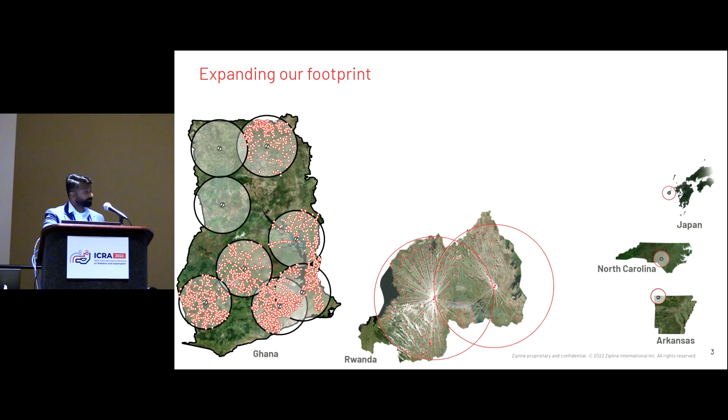More recently, we started operations in Japan and the US, primarily in North Carolina and Arkansas. Our US operations are actually low volume as we are going through certification at the moment. We also plan to extend our footprint this year to Nigeria, Cote d'Ivoire, Kenya, and Utah.

So how does our system actually work? An order is initially placed by a healthcare provider. This can be done via our fulfillment system or WhatsApp message.

Once our fulfillment operators receive the order, they pick and pack the product in a cardboard package and put it in the Zip. The assigned Zip is then launched from our distribution facility, where it travels autonomously along a pre-planned route to the target destination. This is done at approximately 300 to 400 feet above ground.

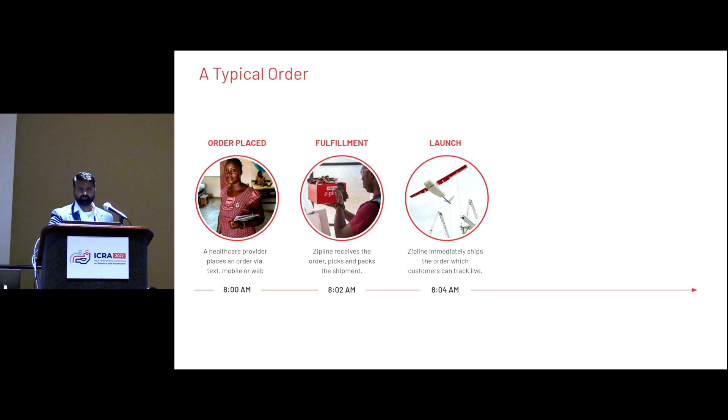As it reaches the destination, the Zip informs the customer of a pending arrival and descends down to a lower altitude of approximately 100 feet, then parachute drops the package to an assigned target destination. We typically achieve a 6-meter radius accuracy, about 2 parking spots.

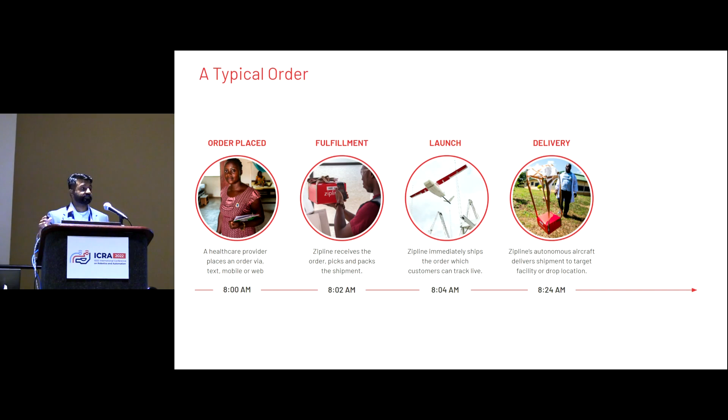Once the order is delivered, the Zip returns back along the same route to be recharged and reloaded for the next order. So here's a little video that gives you a sense of what the operations are in Rwanda.

What you see is a typical flow from our fulfillment operators that have packed and assigned the product to the facility. The flight operator receives the package and assigns it to a Zip prior to loading it. As you can see, the package has a paper parachute that's clipped into the payload bay of the Zip body. The vehicle is divided into 3 main components: the body, the wing, and the battery, which is designed to be interchangeable.

These, in addition to our foam nose cone, are assembled on our launcher prior to every launch. As an aside, the launcher we use is a catapult launch system that accelerates our vehicle from 0 to 110 kilometers an hour in 0.3 seconds.

This is done to handle the wide range of wind conditions that we have to operate in. Once assembled, a series of pre-flight checks are performed by our flight operators, as you can see. This ensures that the vehicle is in nominal conditions.

Internally, there are over 450 software pre-flight checks performed prior to enabling the launch of the vehicle. All of this is done within a minute of when the battery goes into the body. This is to ensure we can hit the flight volumes of more than 200 flights a day within a 12-hour span.

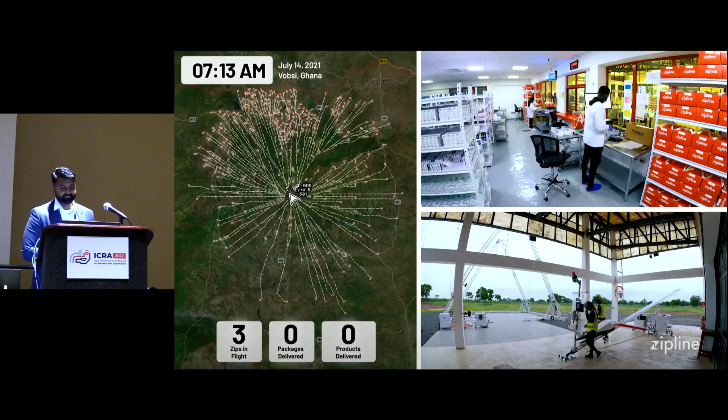Shown here is a typical morning at a Zipline facility in Ghana. On the top right is actually a fulfillment area. On the bottom right is actually a launch and recovery area.

Our recovery system is designed to recover vehicles similar to an aircraft carrier. There's a little A-frame structure you see there. I'm not going to go into too much detail, but I encourage you to check out videos on our website.

On the left is actually a visualization of what the controller of our Zips watches on the iPad UI. The red nodes are 300 to 500 healthcare facilities that are served by our distribution center. Zips en route are shown in white arrows, and zips returning back are in black.

At any one time, we can have 20 zips flying along the same route in the air. At the moment, we can fly up to 28 zips at any one time, delivering to our customers.

Here, it's easy to see that these facilities are dynamic environments that have unpredictable demands and emergency orders that make it difficult to schedule everything that we need. Just within a 4 to 5 hour span, we have done 71 package deliveries of about 550 products.

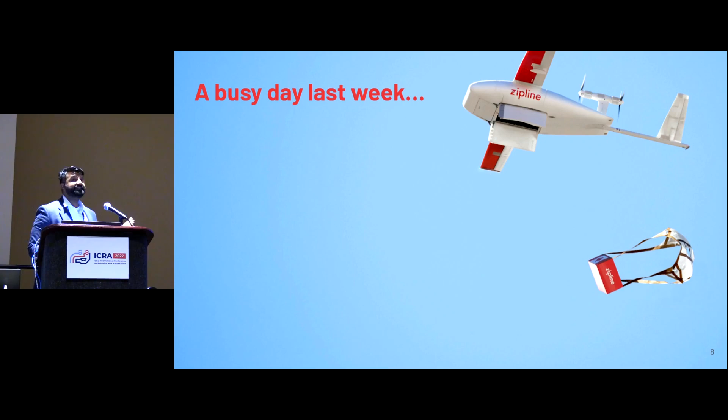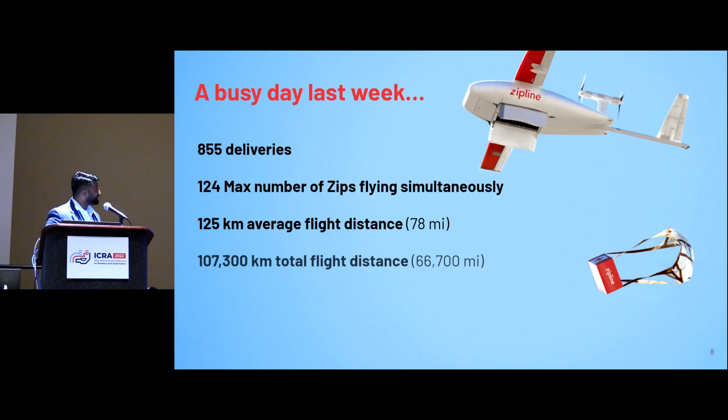To give you a sense of the scale of all our flight operations, here was a busy day last week. In total, from our facilities, we had 855 deliveries, with a maximum of 124 zips flying simultaneously, and an average flight distance of 125 kilometers. This translated to a total flight distance of 107,300 kilometers flown in one day, equivalent to 2.6 times around the equator of the Earth.

As we discussed, achieving 28 zips at once in shared airspace requires shared airspace and shared resources. We think of this as airspace autonomy. It's really difficult to predict when a zip will need to modify its mission, so there needs to be an online algorithm that keeps our zips safe.

Our zips are at times in places where there's no cell connection, and there's literally no phoning home. So centralized planning algorithms don't work. What we've designed instead is a distributed collision avoidance algorithm and distributed resource allocation algorithm. There's only one launcher and one recovery system, and this is robust to lossy comms. Each of our zips has its own line of sight radio and dual cell modem, and whenever they're in proximity to each other, they communicate.

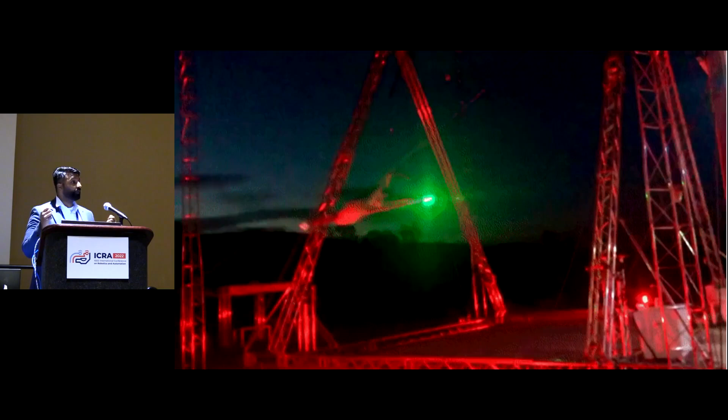All right, that was a quick primer into our mission and current scale. Now I want to give you a bit of backstory as to why we developed our detect and avoid system. Our detect and avoid system is ready for production today, and you're the first folks outside of Zipline and the FAA to hear about it.

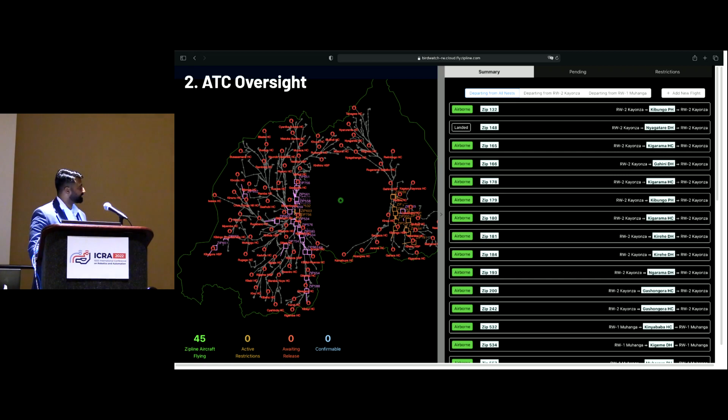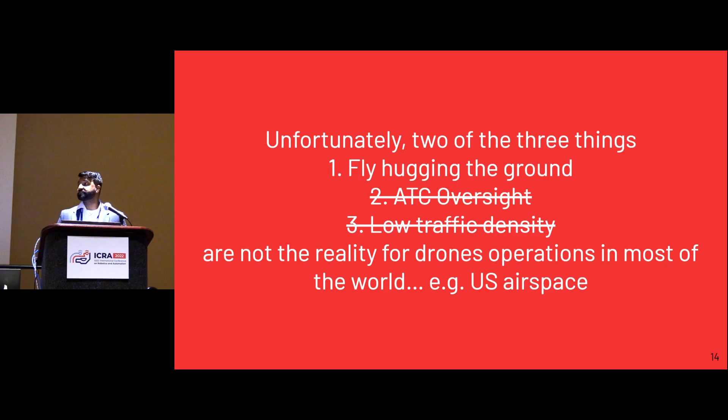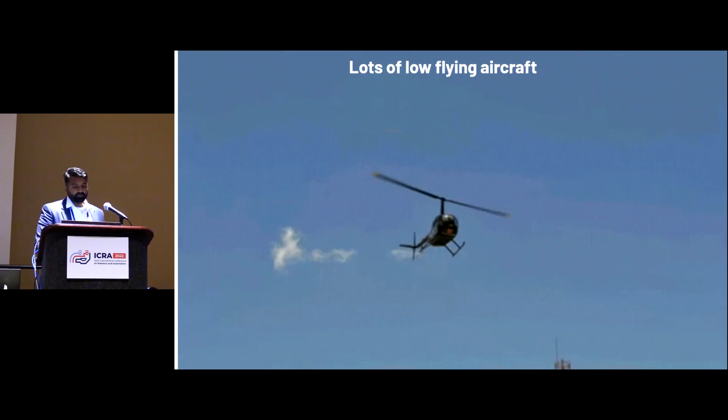I'd shown a typical Monday morning in Rwanda. This is a typical Monday morning in North Carolina, Charlotte. There are orders of magnitude more traffic that we have to heavily account for. In addition, the prevalence of low altitude operations is high in these areas, as there are no real restrictions preventing flight below 500 feet, especially for helicopters and crop dusters.

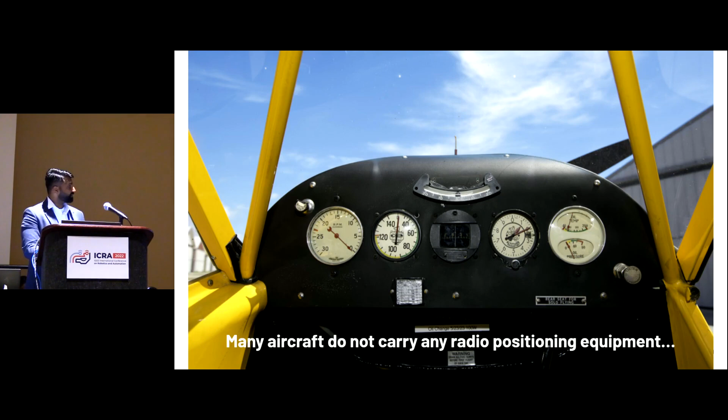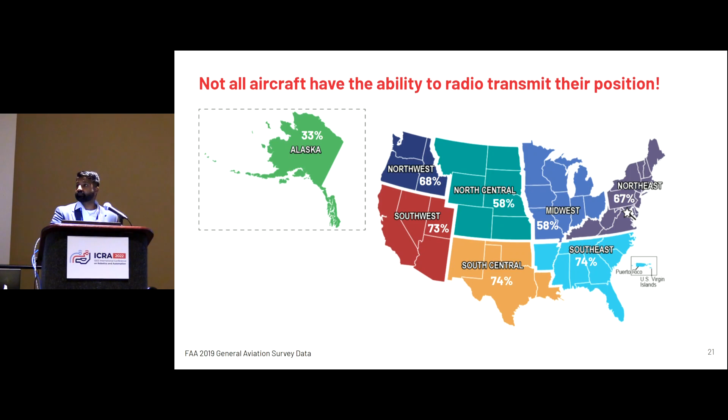The airborne risk associated with the prevalence of low altitude traffic and high traffic densities is amplified by one more factor: many of these aircraft do not carry radio positioning equipment, also known as transponders. Here's a typical cockpit of a Piper Cub that has just analog dials, with no radio equipment on board. A survey performed in 2019 by the FAA showed transponder usage hovered around 70% in certain regions, and was especially poor in the Midwest and Alaska, where it's about 33%. It's quite mind-boggling, the number of low-flying aircraft with no positioning equipment.

How do these planes actually not hit each other? They just look out the cockpit. The pilot's ability to see and avoid is the approach used to solve the uncooperative detect and avoid problem, which is aircraft with no positioning equipment. The effectiveness of this ability has actually been studied deeply, and it's not great, especially when you think about pilot reaction times.

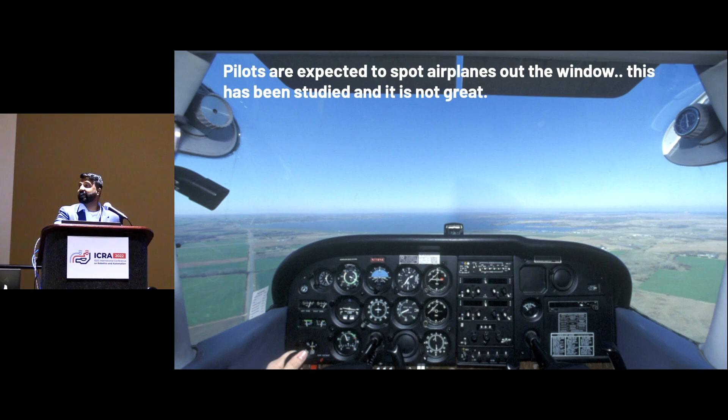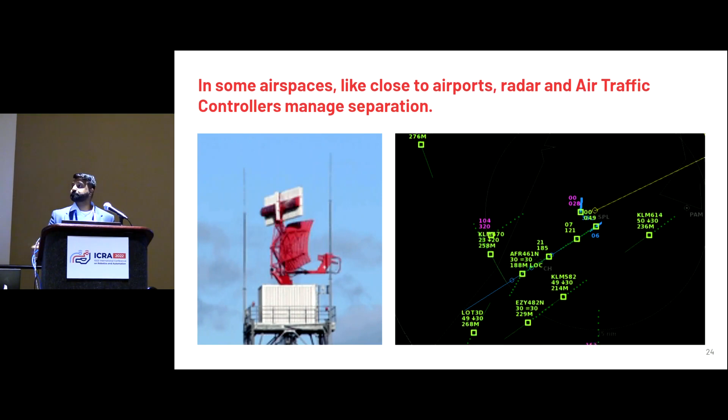In some airspaces, such as close to airports, there's radar that has the ability to track aircraft, and there are specific rules around operating in these airspaces. But radars are sparsely distributed, and the moment you get below 400 feet, it's very hard to detect with radar. So it looks like we had to solve this. To actually solve this problem at a truly national scale, our zips would have to have an onboard sensor. It's entirely impractical to think of populating a whole country with ground-based radars. We actually thought of that and tried to figure out how we would achieve it.

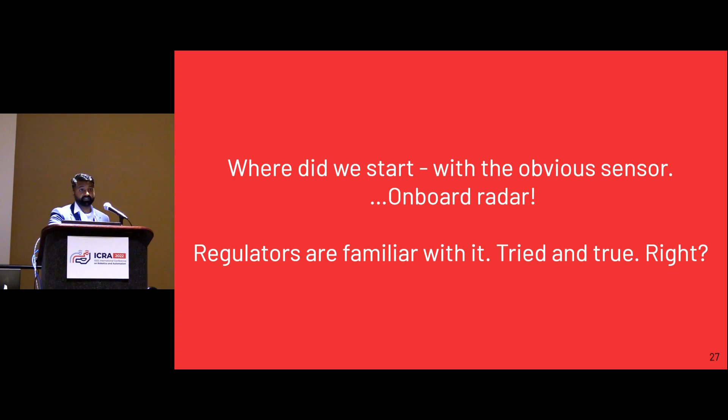The journey to build our onboard detect and avoid system. So first off, where did we start? We were thinking about the most obvious sensor to use. The biggest one is, let's try an onboard radar. Regulators are familiar with it, it's tried and true. So we started doing a bunch of testing with the current state-of-the-art radar systems pitched for sense and avoid.

Right off the bat, for the field of view and elevation provided by that sensor, it took quite a bit of mass and was power hungry. To put 60 watts into perspective, our zips cruise at 600 watts. This radar sensor would consume 10% of our power budget, which was pretty wild.

Nevertheless, we kept testing to better understand the system. A failure mode we started to find is that aircraft between the drone and the ground, within the radar's field of view, really struggle with the signal-to-noise ratio problem and don't get detected. If you're familiar with this in the autonomous driving space, you know this problem too. So looking forward with a limited field of view was clearly not going to work. There's aircraft coming from everywhere.

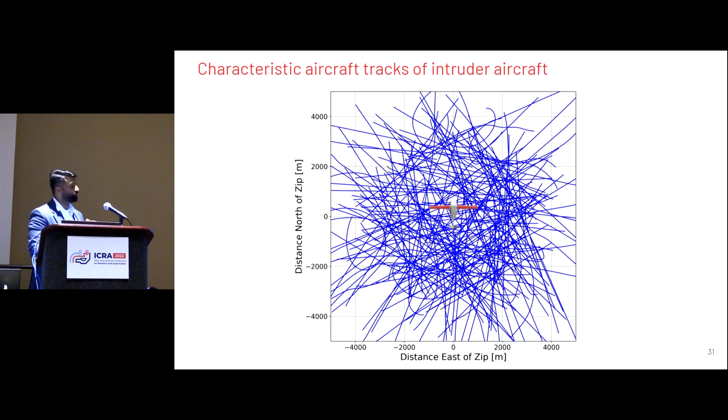Here's a visualization of this in action. This is a visualization in a zip-centric frame showing characteristic general aviation tracks built by MIT Lincoln Lab, trained on years of historical air traffic data. Our zip is not to scale, keep in mind. In general, if a Cessna collides with another aircraft, it's the Cessna's fault. But if the Cessna collides with our drone, it's our fault. The drones do not have the right of way, so we have to avoid and yield to all aircraft. Obviously our zip needs to see 360 degrees, so we started thinking about what other options we had.

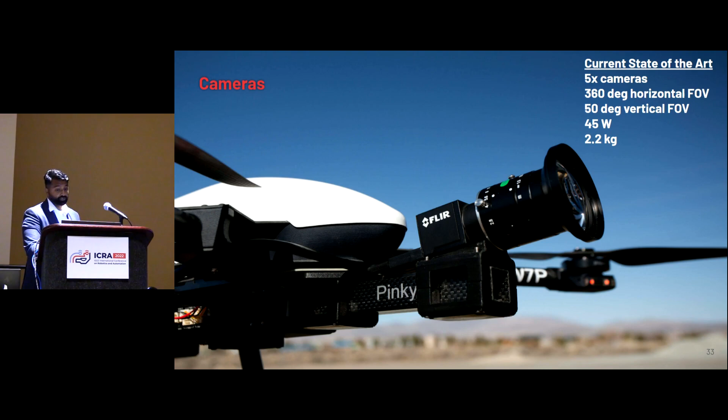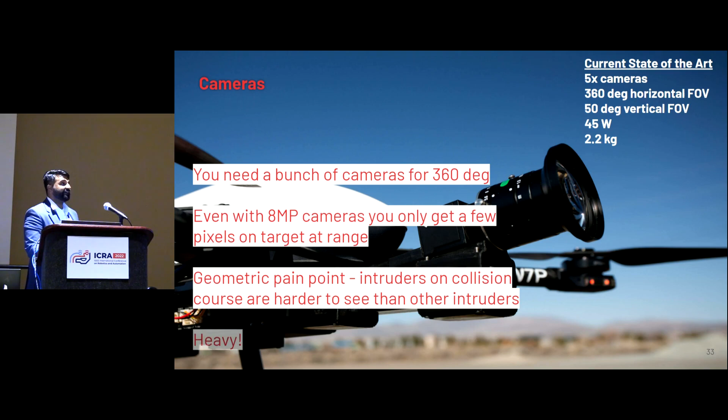We next looked at cameras, with a critical need to ensure 360-degree coverage. It was evident that a bunch of cameras could achieve that. We needed a bunch of cameras to get 360-degree coverage, and each would have to be at least 8 megapixels in resolution to ensure we had enough pixels on target. Cameras also inherently suffer from a geometric pain point: if an intruder is on a collision course with you, it's a dot that doesn't move, and it's really tiny. Finally, they're heavy and quite power hungry.

The biggest kicker is that we fly regularly into and out of clouds and close to clouds. Medical emergencies do not wait for clouds to clear, and this is one of the Achilles heels of cameras. Basically, we need 360 degrees and also the ability to work in clouds.

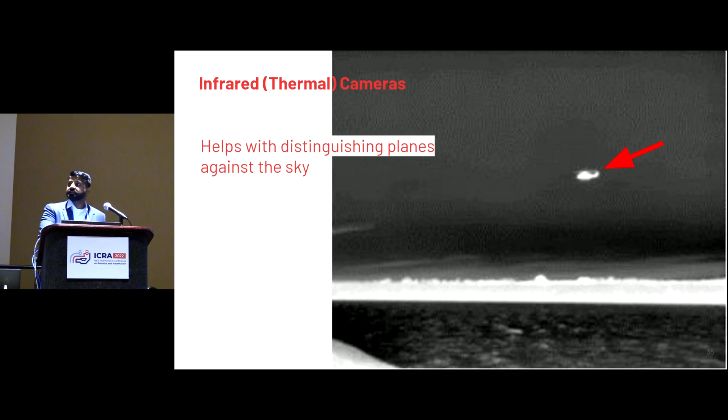The next thing we started exploring was further up the electromagnetic spectrum: thermal imaging. In general, its performance was observed to be pretty great, especially against the background of the sky when detecting aircraft. However, the moment there's an aircraft below the horizon, this became problematic. There are actually two aircraft in this image. And generally it became a non-starter, as one to two megapixel imagers were the state of the art, which doesn't give us nearly enough pixels on target.

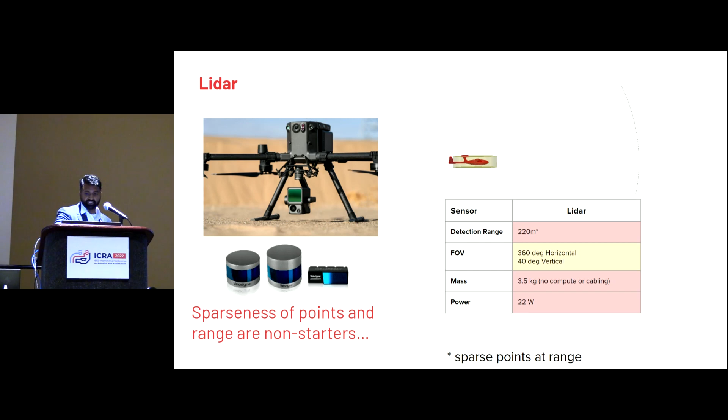You might be asking, why not LiDAR? This essentially became a non-starter, primarily due to detection range and the sparseness of points at long range. So we seriously tried everything we could on the electromagnetic spectrum, and we were stumped. How else could we actually solve this problem?

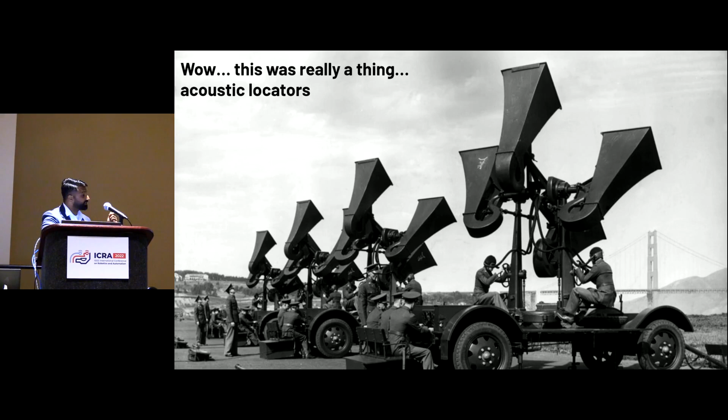So what about acoustics? There's a lot of historical literature where acoustics was the primary mode of detecting aircraft in World War I and early World War II, prior to the advent of radar. Here's a photo of soldiers listening for aircraft. Acoustic locators were used from mid-World War I to early World War II. These were passive devices that picked up the noise of engines and propellers of aircraft. The horns you see give increased gain and directionality. In addition, the spacing between the horns gave the listener—the soldiers—the ability to localize the sound source. It was wild, but these acoustic locators could actually hear planes well over the horizon, tens of miles away.

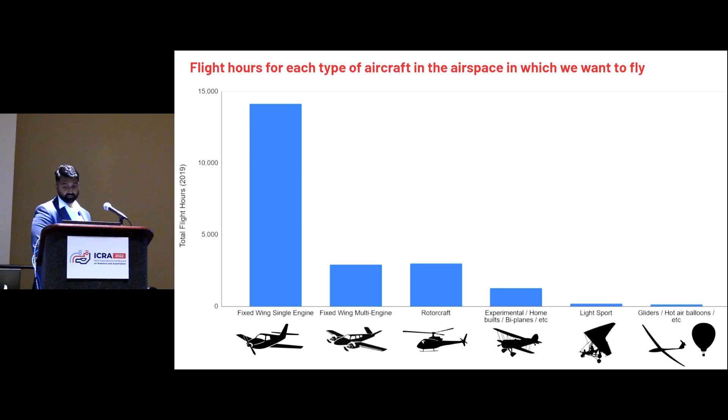Not really all aircraft are loud, as you may surmise. So even if we could solve this technical challenge, could we achieve the necessary level of safety with an acoustic system? We started digging into the data of all the aircraft that typically operate in the airspace and broke it down into various critical categories. We realized that 98.5% of these aircraft are propeller-driven, rotorcraft, or turbojet. This is great, so we would not even need to get 98% detections to achieve our level of safety. As a side note, 98% is better than a pilot looking out the window, essentially.

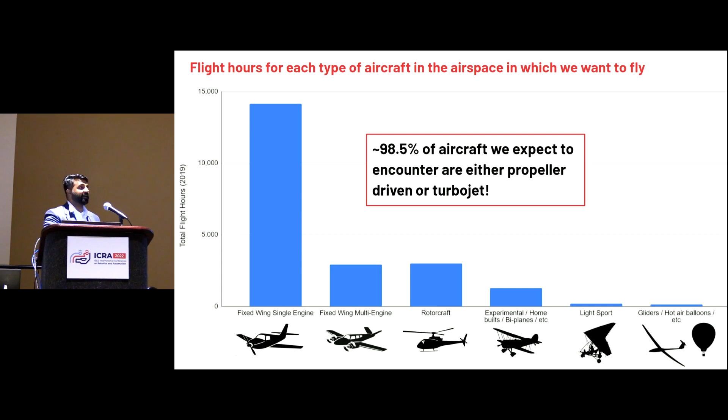At this point, we weren't convinced about this idea, but it was super attractive because in theory, we could get 360 degrees field of view in technology that's light enough to actually fly on a drone. So we asked ourselves, how can we actually kick the tires on this problem?

Our first experiment was just putting some microphones on the ground to see how far we could hear the aircraft. It was actually really far. We could get easily detections up to 2 kilometers away on any day. The ground rig was equipped with 6 microphones in a T-bar and a little 2-megapixel camera.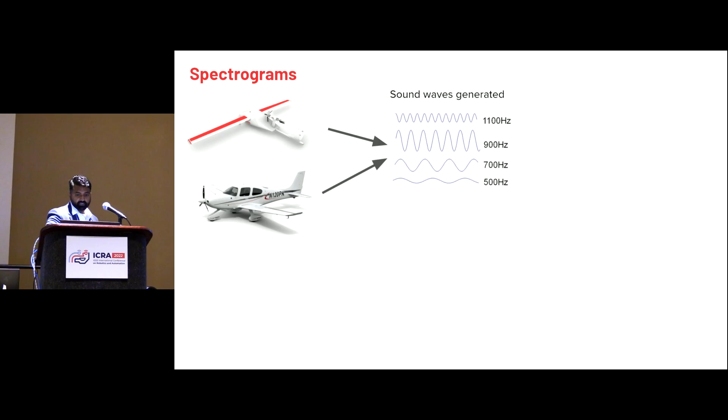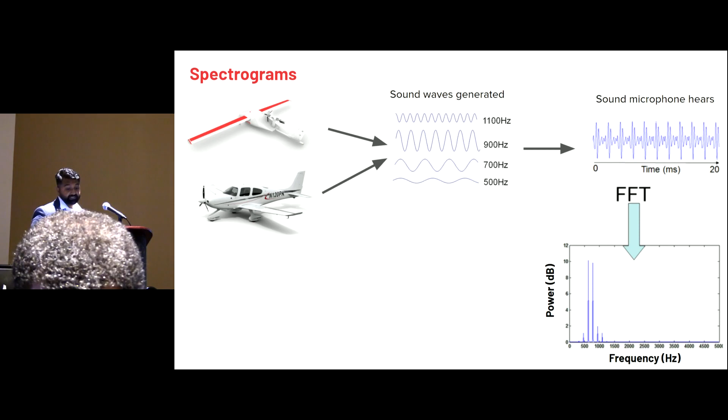As an aside, given that we're going deeper into acoustics, here's a quick refresher on spectrograms. Any sound source generates sound waves at multiple frequencies propagating through the air. A microphone like ours on the ground recorder records the amplitude of sound at about 20 kilohertz in the time domain. The recorded sound is then converted into a frequency domain at specific time intervals using a fast Fourier transform, where dominant frequencies clearly show up at higher power levels. These frequency snapshots are strung together over time to form a spectrogram, where the color displays the power levels of that frequency content.

I mentioned easily being able to capture acoustic signals at least 2 kilometers away. I want to visually show what it looks like. Given that we had a camera on board that ground rig, here are a couple of examples of aircraft images captured with that rig and comparative spectrograms. We captured an SR-22, a general aviation aircraft, at about 3,000 feet, that little dot on the camera in the red circle. At the same distance, the spectrogram distinctly shows a specific signature related to the blade pass frequency of the propellers and its harmonics. On a first principles basis, the typical RPM of an SR-22 flies at about 2,000 to 2,500 RPM, with 2 to 3 blades, and that translates...

Awesome, talking about acoustics. All right, I don't have to shout, and I think the acoustics here are pretty good, so let's go.

Cool, so this translates to about 100 to 150 hertz for the fundamental frequency, and multiples of that in the harmonics. That's exactly what you're seeing in this plot.

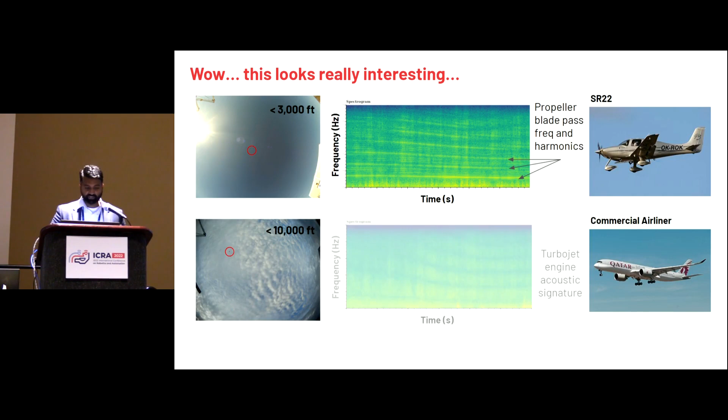Similarly, we captured a commercial turbojet airliner at 10,000 feet. The acoustic signatures here are also unique and very different from that of an SR-22. The regions of high power are actually more broadband than the peakiness in the SR-22.

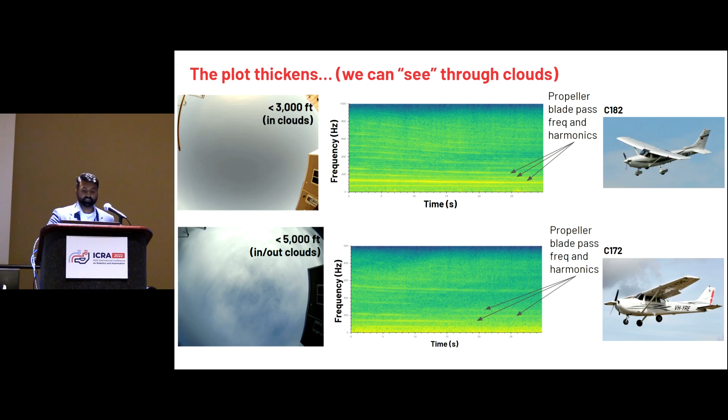Interestingly, we also captured air traffic when there were low cloud layers at our test facility. Here's an actual video of a Cessna 182 overhead going into and out of clouds. It's actually really hard to see, but it's actually a video. The same thing was evident - the acoustic signatures are clearly visible during this whole time. The same thing was evident from a Cessna 172 as well. It was actually a revelation, to be honest, on our end, to see how clear these signals were, despite how degraded the camera performance was in dealing with it.

After our first set of experiments, we were like, let's start flying. We got excited and decided to make a jump into the air. We went straight for gold and started embedding our mics in a wing for an RC plane that we had, to make sure it was the lowest drag and most ideal configuration we would like. Immediately we ran into a problem.

In essence, there are 2 big problems once you get in the air. The image of a dog sticking its head out the window is actually to visualize what a microphone hears when it's in the air. The loud swishing sound you imagine hearing when you stick your head out the window is primarily due to aeroacoustic noise generated around your head and the car itself.

General aircraft aeroacoustic noise was our first problem. The second problem we had to deal with was our own aircraft's propeller ownship noise. So these were the 2 big issues we had to work on.

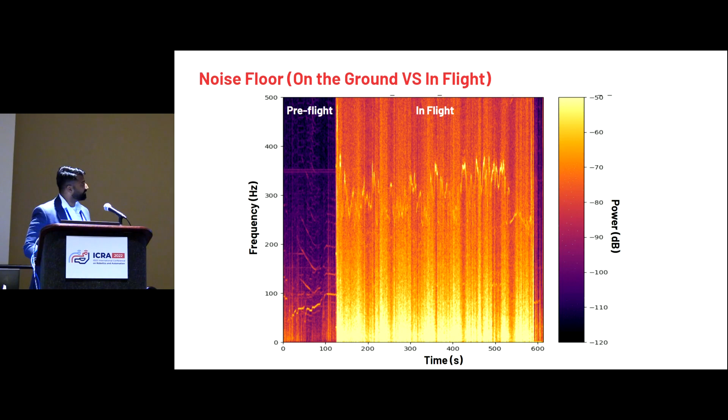The moment the aircraft was in flight, the first thing you notice is the prevalence at around 300 to 400 hertz of our propeller ownship noise. The second key factor observed is this general aircraft aeroacoustic noise that critically impacts our low frequency regions, which is exactly where we need to detect general aviation aircraft and helicopters.

So we had a problem, and we figured out what we needed to do, and essentially what we did was form what we call a tiger team. It's essentially the smartest minds in Zipline, including mechanical engineers, applied mathematicians, and systems engineers, to ruthlessly prioritize and focus on failing fast and achieving in-flight acoustic detections of a Cessna 172 up to 1.5 kilometers away, or know why it could not be done.

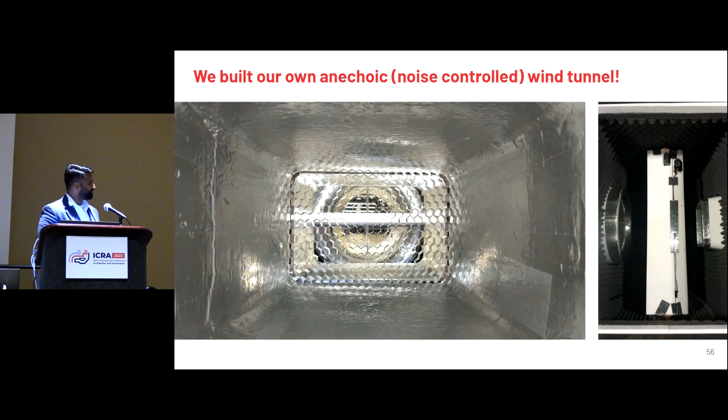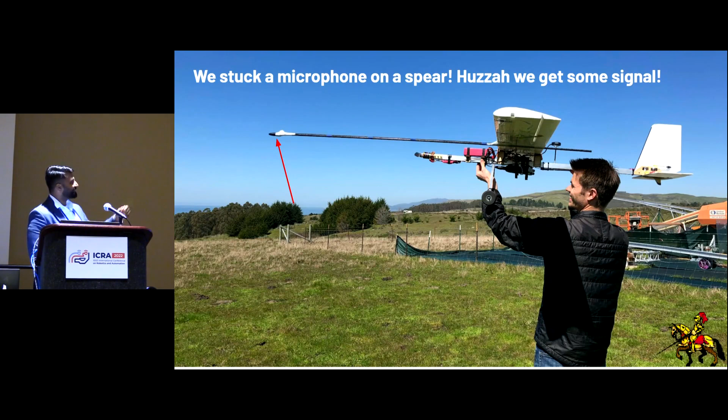Then we started deeply iterating on microphone tip designs, really dialing in on critical locations that might allow us to handle this noise well. This included trying to put them above the wing, out in front of the leading edge, and we even tried to stick it on a giant spear, to get away from all the aeroacoustic noise.

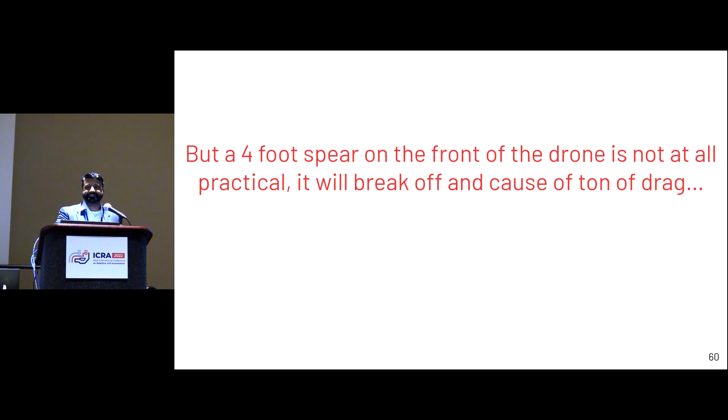And it turned out this worked. We started to get signal on its effectiveness. But obviously, a 4-foot spear in front of a drone is not that practical, to say the least. And not to mention, it's pretty scary looking and dangerous and so on. So how could we solve this problem without a 4-foot spear?

Essentially, we ramped up our iterative development based on this anchor point of performance, and ended up trying over 30 plus different hardware mounting iterations. This included modifying the leading edge of the wing with an embedded mic. It involved adding trailing edge chevrons as seen on the 787 engine nacelle to help reduce the trailing edge noise, which was by far the dominant aeroacoustic noise generated by the aircraft.

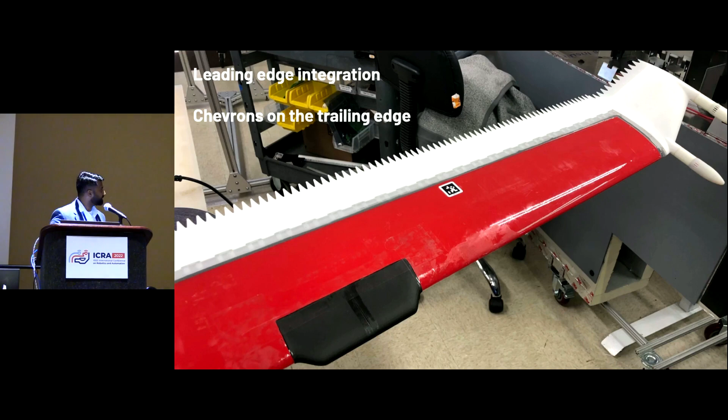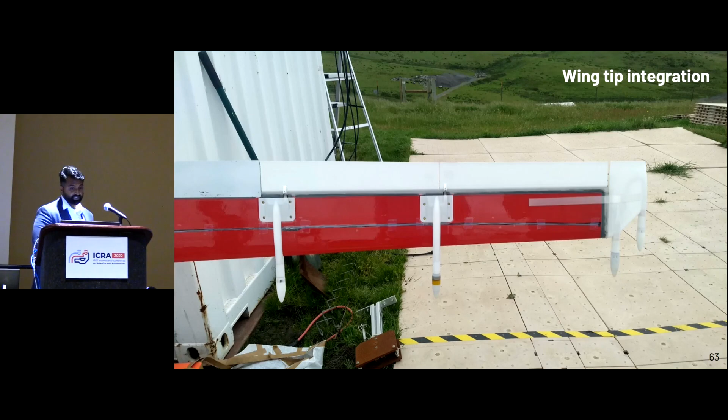We explored various modifications that added winglets to the wing with integrated mic tips, and also a variety of wing-mounted configurations with adjustable mic tip designs. We finally cracked a tip design that worked and a placement that worked great, was practical, was low drag, low mass, and used very similar mounting approaches to our other wing-mounted pitot probes.

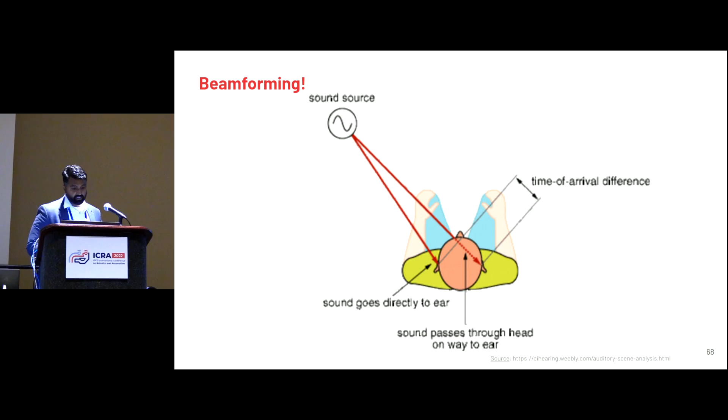From the speed of sound, we know that the sound source will reach our left ear first, and then followed by our right. Of course, there's other factors that underlie how our head deals with sound. But in essence, the difference in time and the speed of sound allows us to assess the direction of that sound source.

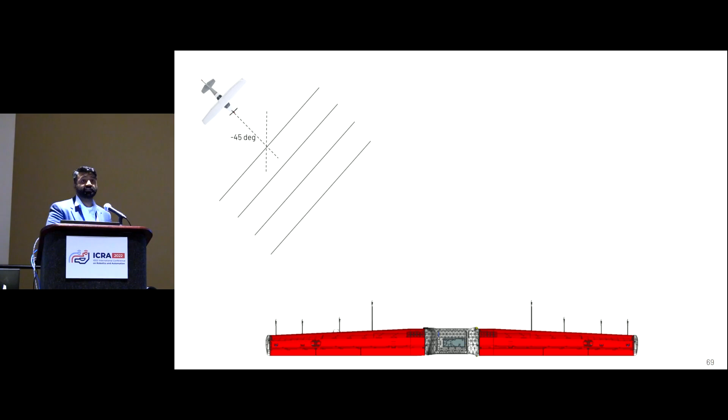That's the essence of beamforming. Now, with our wing with 8 microphones, frequency domain audio data from every channel is processed with an algorithm that estimates the azimuth angle to a far-field sound source, using phase shifts that can be observed between the individual microphones. What you're seeing on the right is a sample azimuth angle frequency beamforming plot for a single time slice.

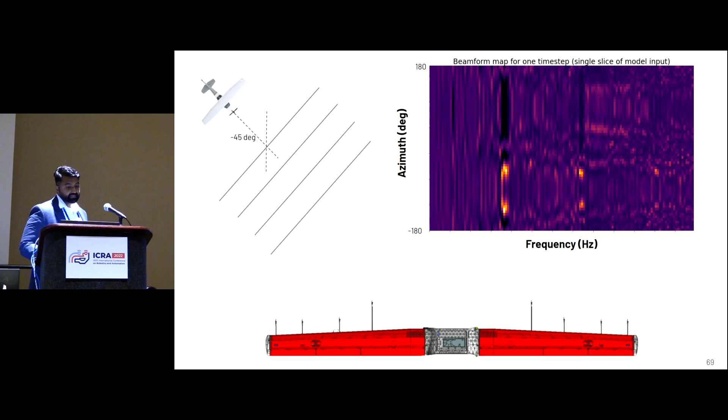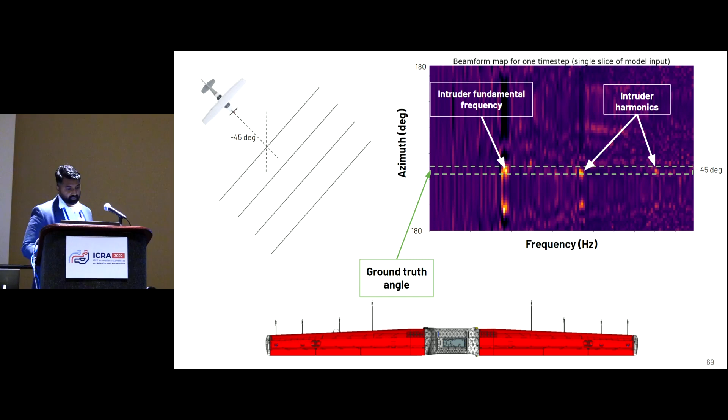The signal from the intruder coming from -45 degrees, as shown on the left, shows up also at the same frequencies, and the same angle shows up at multiple frequencies corresponding to the fundamental frequency of the intruder and harmonics of it. Some ambiguous detections also arise with slightly lower power that must be dealt with. This is primarily due to the nature of the geometry of that microphone array.

For the case of an intruder on 45 degrees forward on the left, there's an ambiguity actually 45 degrees aft and to the left, essentially.

This process helps us minimize the noise from nearby sources, given that the system explicitly looks for that far-field source and removes uncorrelated noise such as wind gusts. Most significantly, it actually also improves the signal-to-noise ratio of that far-field noise source.

So we did it. We decided to go party at that point.

But now, all of a sudden, this went from a crazy idea that we were trying to fail quickly to looking like a brilliant counterintuitive solution to a really hard problem. But of course, we were miles away from a solution that we could operate in production. This was 1 year into our journey, and that was actually 2 years ago, to be honest. I want to take you through the next 2 years of how we went from here to a production-level solution today. Something that works so well and so reliably that we can look regulators in the eye and tell them it's ready for integration into the airspace.

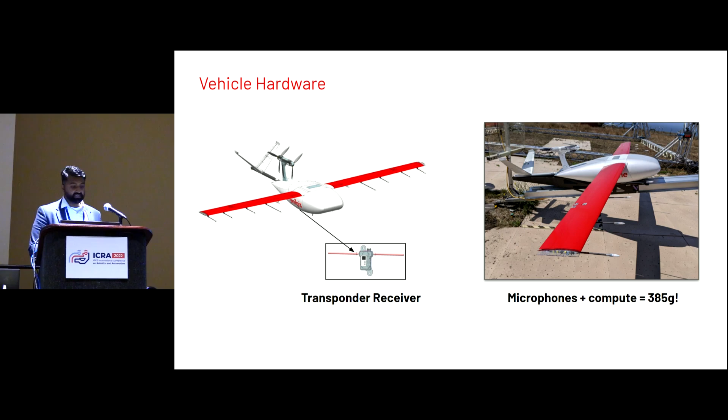Looking at the vehicle hardware itself, the vehicle configuration that we ended up with was an updated wing with an 8-microphone array along the wing. This was in addition to a transponder receiver located in the body for the proportion of aircraft that did radio transmit its position. The combination of those 8 microphones and our compute necessary to run the detection and tracking algorithms came up to be only 385 grams, and it ran about 6 watts.

Looking a little more under the hood, the microphone probes mounted along the wing consist of specifically designed mic tips that house the microphone together with the mounting structure and necessary electronics to connect the microphone to the rest of the wing. Signals from all 8 mics are captured and time-aligned and sent to a perception compute that was housed in the center wing structure of the wing.

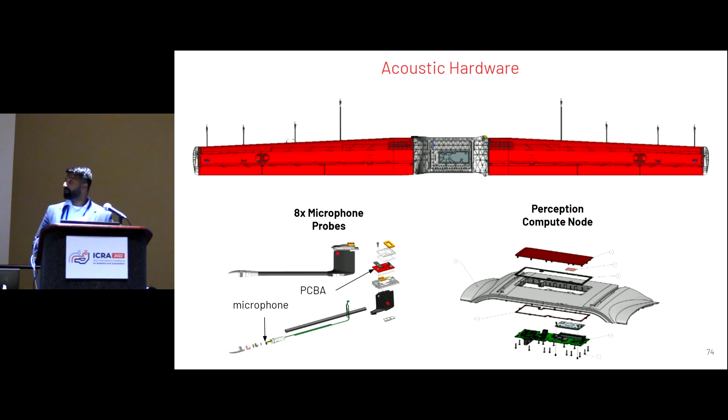Here, the perception compute is a low-powered GPU mounted on a PCBA, and also we have a heat sink to dissipate the heat generated by the GPU in flight.

We take reliability and testing very seriously at Zipline. This has allowed us to reach the unsurpassed reliability and uptime levels that have enabled us to scale our operations where we are today. An example of one of these hardware reliability tests is what we call a flight load cycler.

The flight load cycler is a device that essentially holds the whole aircraft with a wiffle tree-like mounting structure for the wing within a container. The flight load cycler subjects the whole aircraft to typical loads the aircraft would face in operations. Included within the container are also rain and heat simulators to ensure that the vehicle and its components are subjected to similar environmental conditions. This is conducted over multiple days whenever we have new hardware.

In addition, we subjected our microphone to drop testing. This involved dropping the vehicle similar to what it would when it was landing from an emergency parachute deployment. This would allow us to understand key breakage points of the probe and perform necessary redesigns to handle these situations well.

We also needed to subject our zips to launch and recovery loads, as those parts of the mission profile have the highest G loads. What you're seeing is our zips and probes subjected to launcher load cycling.

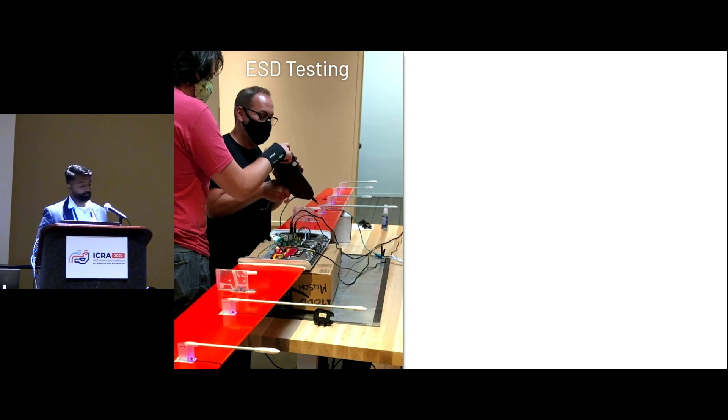Whenever we integrate new hardware into a vehicle, a critical check is the impact of electromagnetic interference. This is to ensure that our GPS units, our primary mode of positioning estimation, are not affected by these components.

Given that our high volume operational environments are closer to tropical climates and our test facilities have been in temperate areas, we needed places where we could test in much colder conditions. So we have a high volume test facility in North Dakota to test our systems in cold, snow, and icing conditions, to really stress test the boundaries and failure modes of the system.

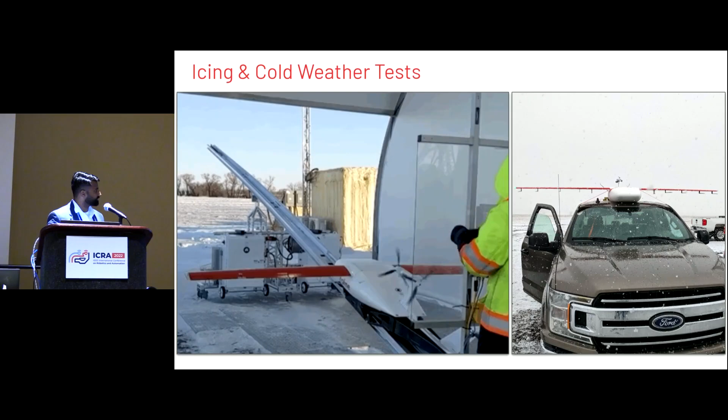Finally, with more and more tested and reliable hardware, we initiated an extensive flight testing campaign to push our system to the limits, and we hired piloted intruders to ramp up our data collection efforts. I'll be talking more about this shortly.

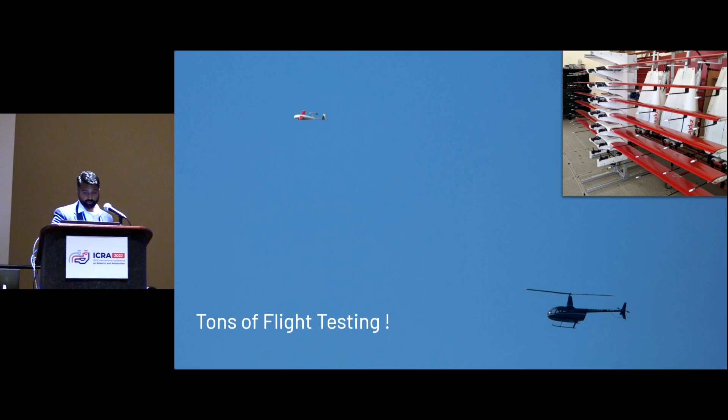Next, I wanted to jump back into the software side of the picture. If you remember, we are able to leverage beamforming to extract the highest signal-to-noise ratio signal, and now we need to do something about it.

For us, detection means two things: first, whether there is an acoustic signature of a crewed aircraft, and second, what is the azimuth angle from which that sound source is coming, which we call direction of arrival.

From our dive into beamforming earlier, we know that each beamform map you see is a slice of both frequency and azimuth content, and we use that as an input into our models.

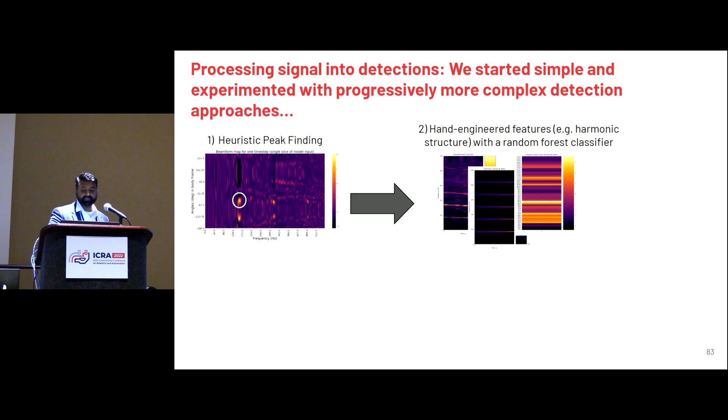We started very early on with a simple heuristic peak finding method. From there, we moved into looking at multiple time slices using various hand-engineered approaches, such as a random forest classifier model. Then, as we started to gain and collect more data, it became obvious that an approach where we learned the key features would outperform previous methods.

The visualization I'll be showing is with a hired intruder heading towards a zip from approximately 1.2 kilometers away and crossing overhead the zip. The bottom plot shows the ground truth distance of the intruder relative to the zip and corresponds to the same outputs shown in the figures I'll be showing.

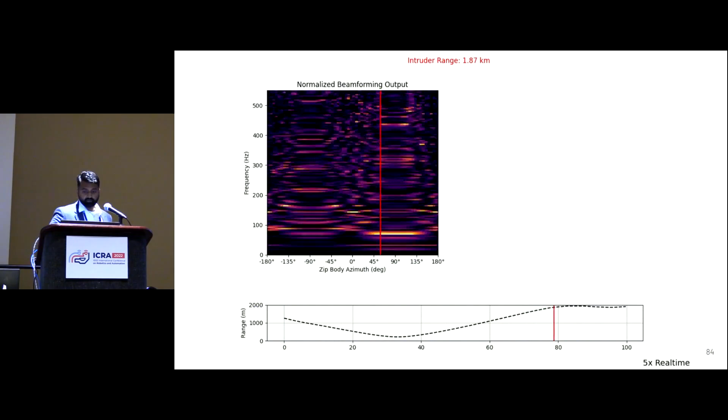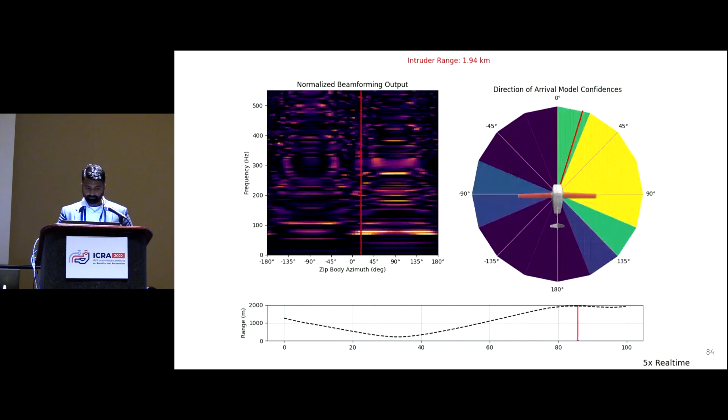So we are getting detections. Can we improve our understanding of the intruder's locations now? We can use a tracker for this. We take each of these detections at each time step and incorporate them into a dynamic occupancy grid that models and tracks the free space around the zip in a zip-centered NED frame.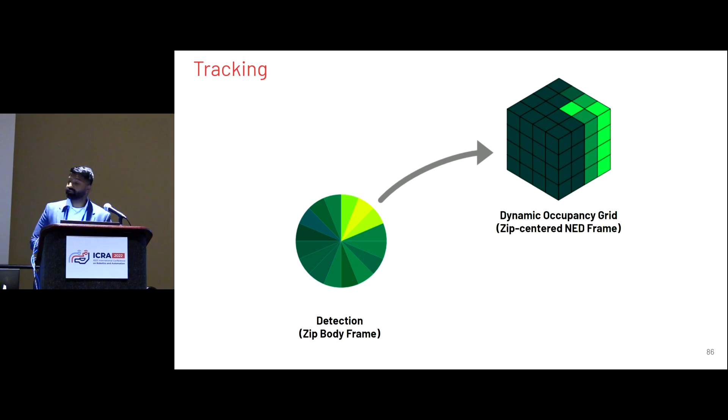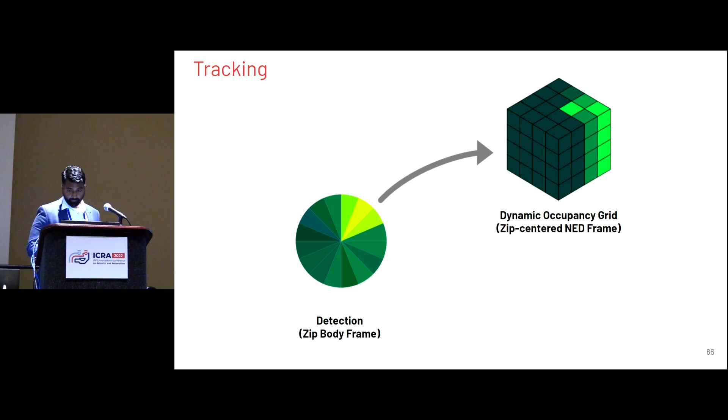This method allows us to track the position of a potential intruder, and as our confidence increases, the uncertainty of the intruder's position is reduced. By choosing to model free space instead of per-object tracking, we limited the compute required for our embedded compute platform. An example output visualization of the tracker is shown here.

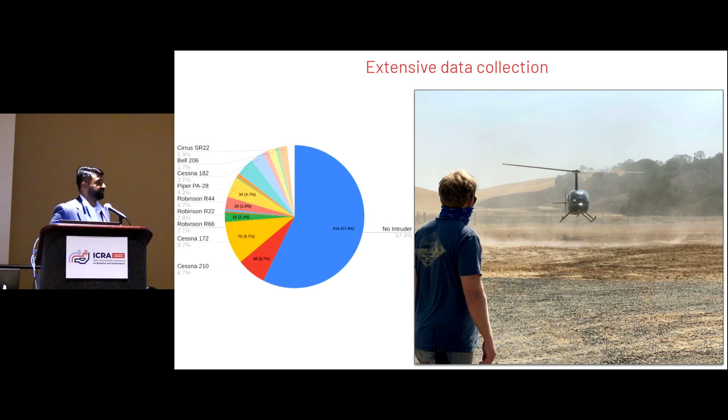Now that we have a full end-to-end system, how could we make it better? We needed a lot more data. We tested over 30 different types of aircraft, putting ground truth trackers on each for hundreds of hours. We had intruders fly in different representative patterns, with variations of altitude and speed, to thoroughly cover what our aircraft would face in the real world.

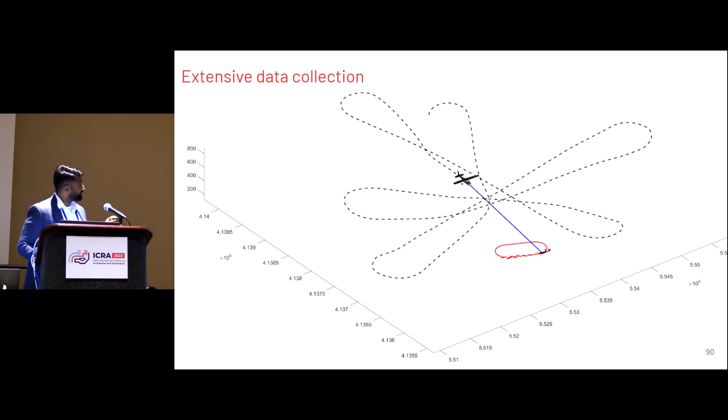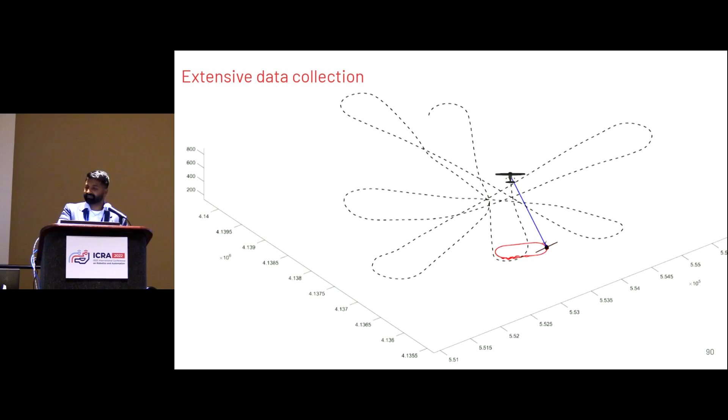We wanted different geometries over varying terrains, because intruders sound different from different angles, and different terrain reflects sounds differently. We went to North Dakota in the snow and Africa in the heat, because sound travels differently in different atmospheric conditions. We tested with different aircraft in good and bad weather, varying wind conditions, and on and on. We also tested against false positive noise sources, such as lawnmowers and motorcycles.

So how do we actually know how good this is, how good we are? To truly assess the performance of our detect and avoid system, we have to simulate our full system at a massive scale. There are 3 key pieces to achieving this.

First, we have to have a software-in-the-loop simulation environment that accurately mimics the dynamics of the zip and has been validated by flight test data. Zipline leverages this simulation tool extensively internally and runs actual flight code to ensure that what was tested in simulation matches performance in flight.

Next, we had to simulate the actual intruder traffic that we might encounter. This is achieved by leveraging encounter models that were developed by the great folks at MIT Lincoln Labs in collaboration with the FAA, based on multiple years of historical data of tracks around the country.

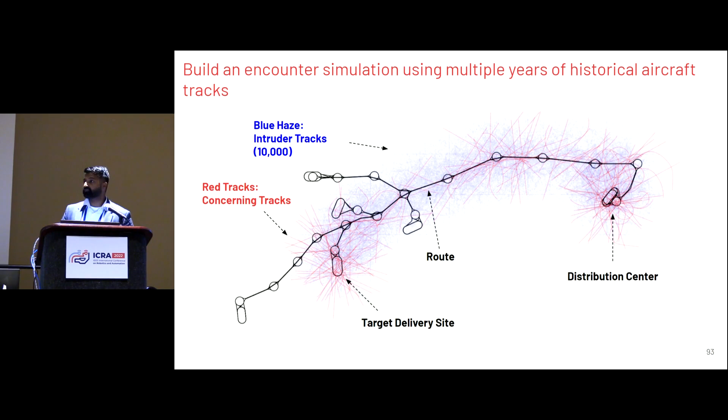Shown here is a Monte Carlo simulation of 10,000 encounters from the historical tracks overlaid over a zip simulated flight route shown in black. The blue haze represents those tracks, and the red tracks are encounters that were of concern. By simulating these encounters, we're able to assess the risk of incursion or collision with and without a detect and avoid system and quantify its actual efficacy.

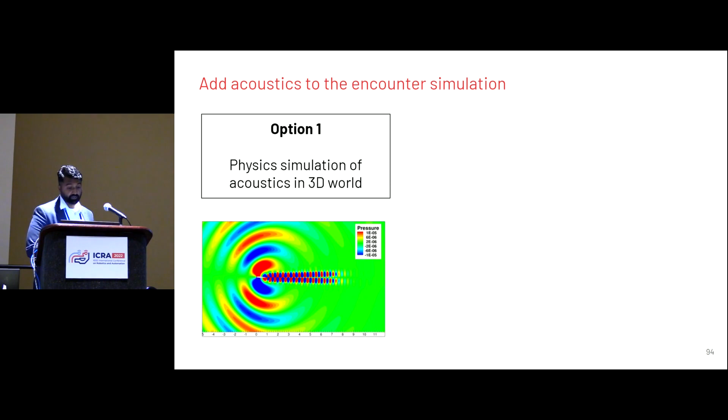Lastly, we had to add acoustics into the simulation of a DAA system. One method was to do a physics simulation of acoustics in a realistic 3D world. But after consulting with experts, it was not going to be representative enough given the multitude of things that we have to account for.

So we went with option 2, which was to build a parametrized model from our large-scale flight test data. The parametrized model correlates inputs available in simulation to outputs of our detection model. So in sim, we have a proxy detection model that statistically matches the same performance of our systems in real life, without having to simulate acoustics.

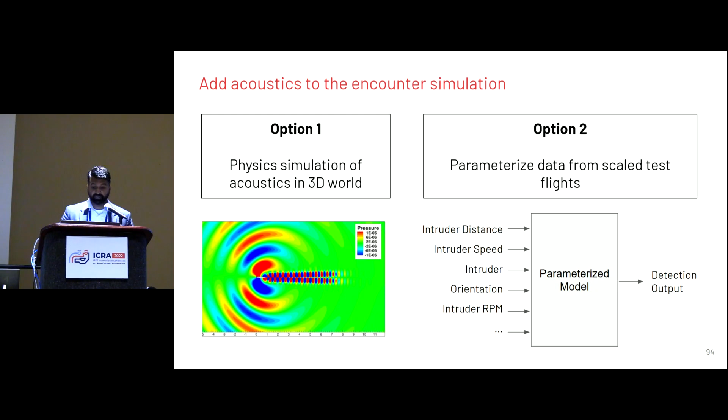Essentially, everything from the microphone input to the output of our tracker was parametrized. Now that we had a simulation environment that enabled us to statistically understand how our combined detect and avoid system would perform against intruders, we needed to work on improving the behavior side of the problem.

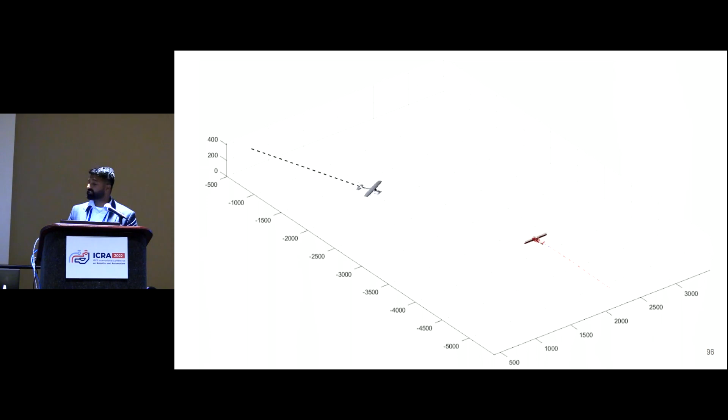This needs its own presentation, but I'll give you a flavor of what that is. In response to an intruder, our vehicle incorporates the acoustic track state information into a cost function, and then the system dynamically replans avoidance maneuvers to maximize for lateral and vertical separation. All of this is done while accounting for everything from winds, dynamic limits of the zip, terrain, obstacles, air traffic, and other zips.

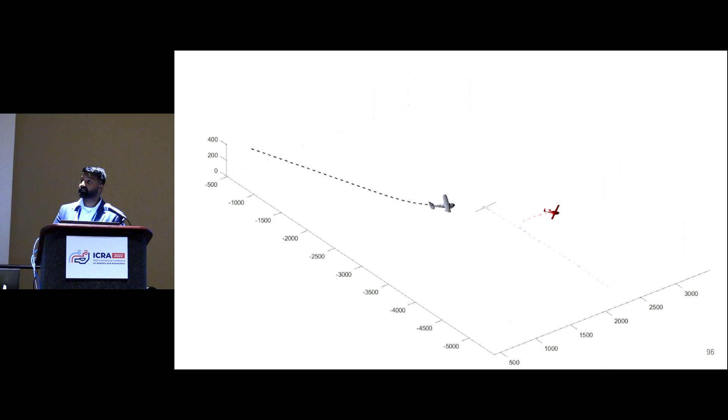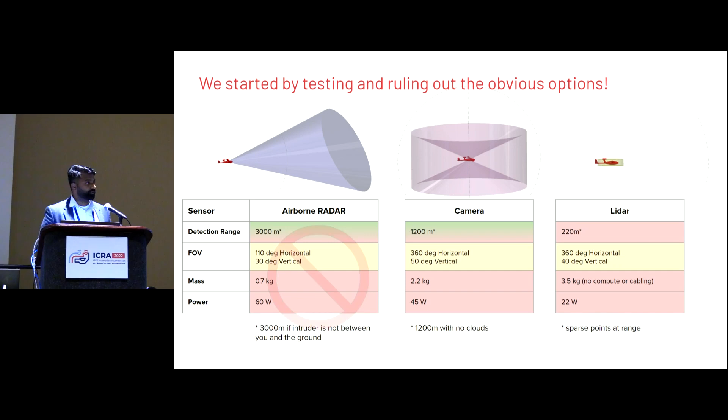So where did this journey take us? We started by testing and ruling out obvious options: airborne radar, cameras, and LiDAR. Then we found a crazy option: acoustics, and spent a year trying to fail fast, but the more we worked on it, the better it looked.

We then spent the next 2 years getting it ready for production, developing the production hardware, machine learning systems for detection, tracking systems, extensive data collection efforts, validation simulation, and finally avoidance behaviors. And now we have a great solution with 360-degree spherical coverage, long-range detections, and we're ready for operations.

I want to step back and also call out and recognize the dedicated efforts of many of my brilliant and smarter colleagues at Zipline that have got us here today. So let's look forward.

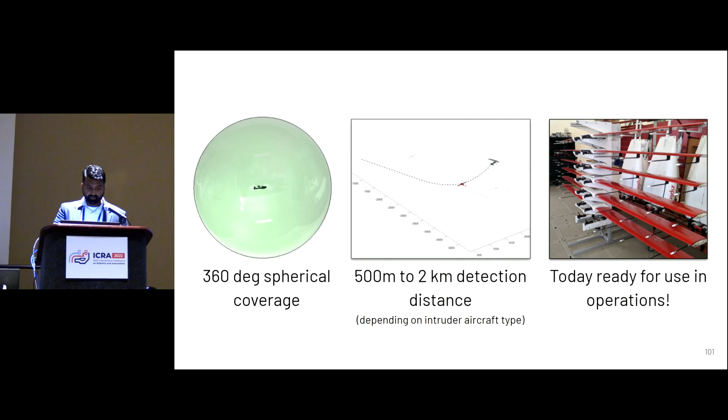Earlier, I had mentioned a busy day last week being 855 flights a day, equivalent to flying 2.6 times around the equator. We are only able to do this by standing on the shoulders of decades of progress by the robotics community over here. So truly, thank you for all your passion and hard work.

But this scale represents Zipline just getting started on our mission, which is to make instant healthcare delivery a reality for all. So we are hyper-focused on our next milestone to achieve our mission. This milestone is 5 years out and is focused on what it would take to achieve 500,000 deliveries per day. This is equivalent to one rotation around the equator in a minute.

The detect and avoid system I presented here is only the first of many perception-based autonomy capabilities we are working on to enable us to truly reach that scale. I look forward to sharing the journey of developing those technologies with you in the future. It was my pleasure to share this with you, and thank you for your time.